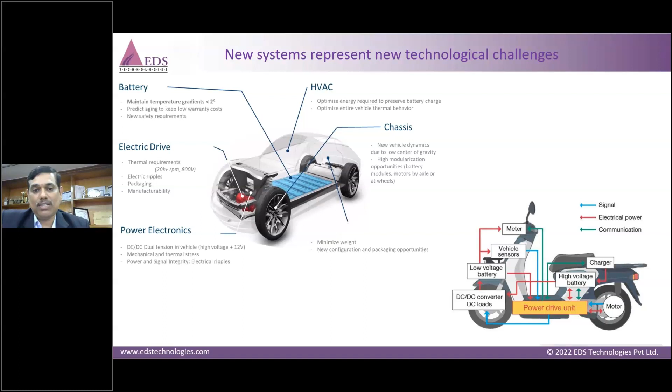Coming to delivering the digital vision, bringing agility into business processes and product innovation requires digital experience. Today everything is digitalized. In terms of transactions we carry out today, India is number one in digital transactions, overtaking China in recent times.

Every day we are very much used to doing digital payments using Google Pay, PhonePe, or other banking transactions. Everything we do in a digital fashion. We don't have to really touch the cash in our pockets as long as we have a smartphone in place. That is what digital experience is all about.

When we bring this same digital experience into the EV segment, delivering the digital vision is the utmost important criteria here. As part of this digital experience, Dassault Systèmes' 3D Experience platform provides the digital vision for the EV segment in this fashion.

We start with 3D packaging to concept, then virtual styling to Class A surfaces, and we need to validate those vehicle experiences upfront even before you start your prototype. These are the three important stages which come in as part of digital vision.

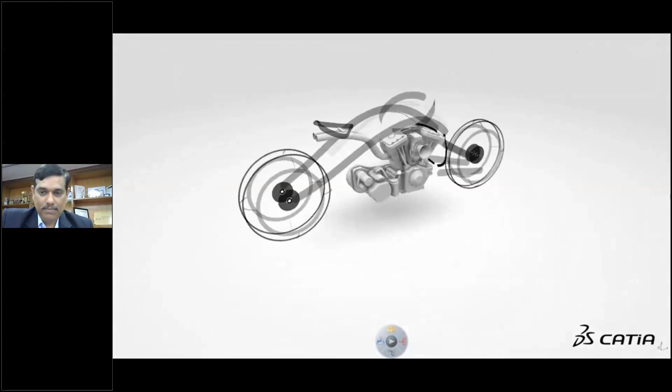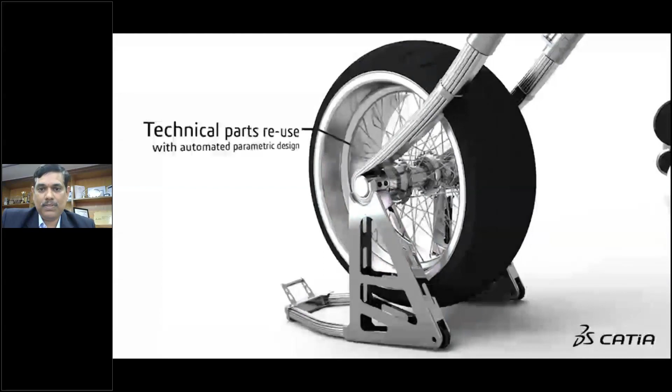This is one project, Silver Bull, started from scratch with a few sketching ideas, which have been translated into a 3D model, a 3D clay model I would say, and then the preliminary design. Then we look into the complete assembly.

This is a typical customer case study run on CATIA 3D Experience. The role is creative designer, using which we are able to start our design right from the sketching stage to preliminary design and then the detailed design.

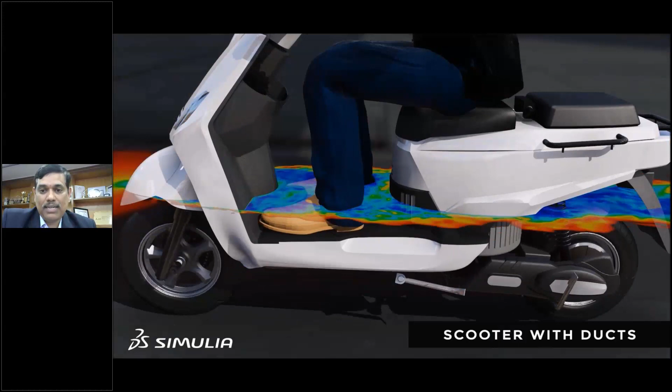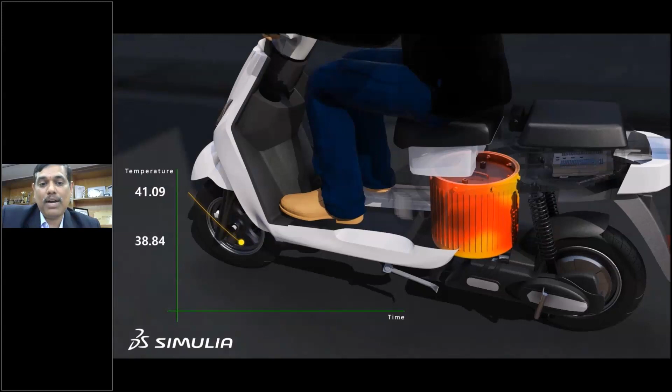This is a typical example from India, wherein the customer is looking at the design of the battery pack. The battery pack is positioned right below the sitting position of a passenger, the driver, I would say. Here the temperature and thermal management is being monitored closely as you get into specific vehicle speed levels, so we examine how this temperature impacts the battery and its cooling system.

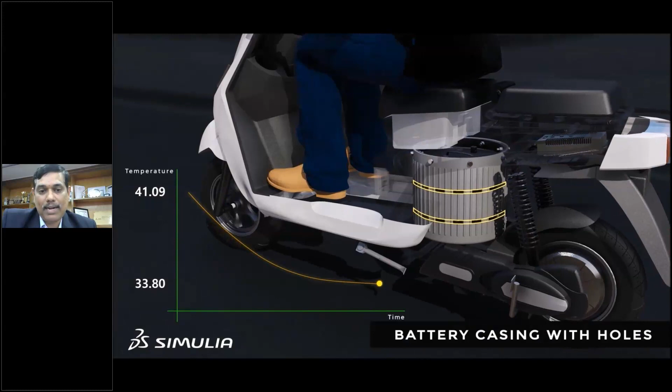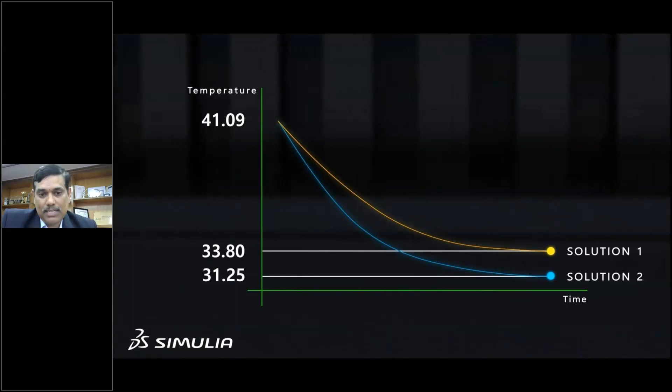In this case, when we provided specific holes to the battery system, we are able to control the temperature of the entire battery pack in a very effective manner at a specific vehicle speed that we move on. You can see the complete battery pack and the battery cells being highlighted here.

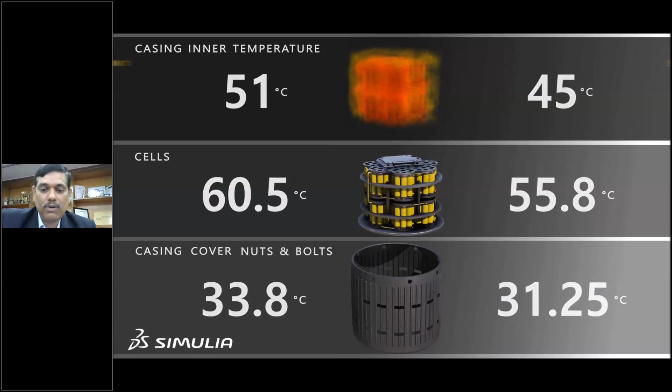When we run the first level simulation, there was 51 degrees centigrade temperature, and when we create these particular holes onto the battery pack, we are able to reduce the temperature to 45 degrees centigrade. This is a typical example even before you get into prototyping. You can create the specific design based on these virtual simulations, and these things are going to be very helpful in the long run.

So the battery cooling simulation is taken as one of the examples, wherein by creating specific holes in the battery module pack assembly, we are able to control the temperature with the vehicle speeds. There are also multiple other simulations which we can run on this EV segment for the two-wheelers. I will run through that now.

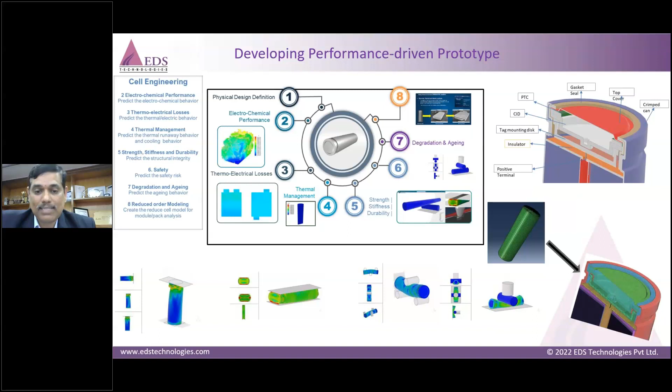Here are a few examples with respect to battery cell simulation, wherein we are able to mesh the battery cell accurately, and also expand these simulations to battery pack and battery at the vehicle assembly level.

Moving on to the important third part, that is achieving collaborative development. When we run this program, when we start an EV program, it definitely requires a lot of players to come together and work in synchronization, be it design, simulation, or manufacturing. The system should take care of the processes running through EV development. Here the PLM, what we call product lifecycle management, plays a very critical role right from the beginning in terms of collaborative development.

As a part of this collaborative development, we have supplier collaboration and sourcing, bill of materials generation, release management and change management, and also digital markup validation on a web interface. These are three important aspects of collaborative development, wherein we work closely with our suppliers and collaborate within teams — project teams belonging to design, simulation, and manufacturing, along with decision makers and managers.

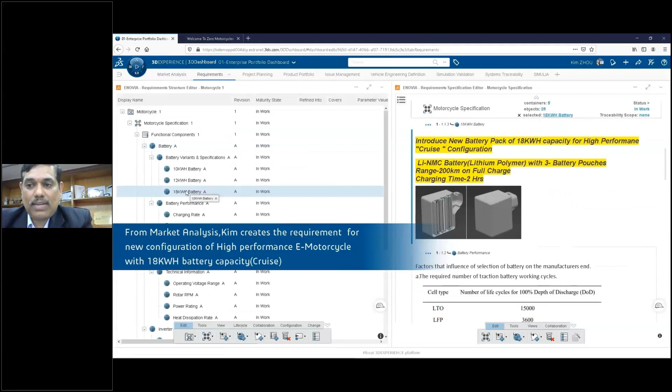There is a requirement for an electric motor vehicle — a long-range electric motorcycle with 18 kilowatt-hour battery capacity. This is taken as an idea in the beginning, with 18 kilowatt-hour capacity and high-performance cruise with long range. Long range here means from 200 kilometers onward. Looking at all these aspects, we look into battery cell engineering.

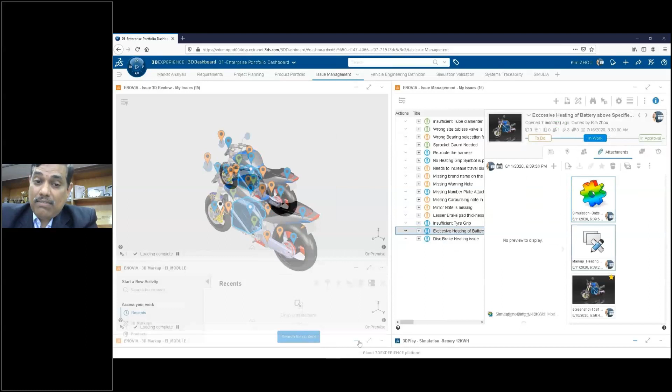There are nickel batteries, lithium, cobalt — multiple types of materials available. We pick a specific material for this battery that will deliver 18 kilowatt-hour performance and capacity. Right now what I'm showing on screen is the 3D Experience platform on ENOVIA, where we can visualize everything on the web interface using HTTP protocol. We can visualize the entire 3D of a given assembly in a 3D viewer available on the web interface — which can be Internet Explorer, Google Chrome, or Mozilla Firefox.

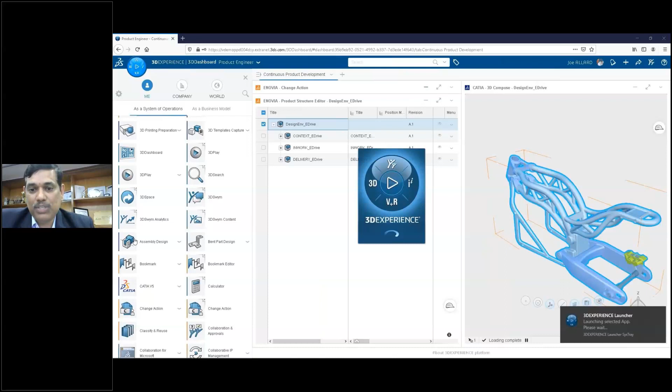We can run through this particular battery development — how to bring in this new battery and replace the existing one. This is where we look at change management, which we emphasize as part of this collaborative development. There is an assembly that holds the battery pack, so we open that in the CATIA 3D Experience platform and replace it with the 18 kilowatt-hour battery pack.

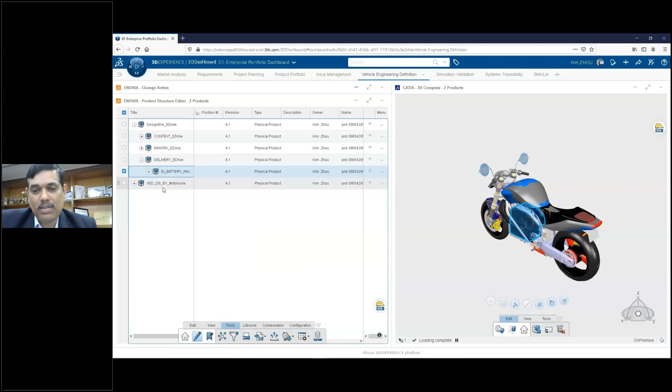Once we complete that, the bill of materials also changes, and the change action is performed on replacing the specific battery pack. Once we complete that, we can validate it again in the 3D viewer, approve the changes, and later see the updates in the engineering bill of materials.

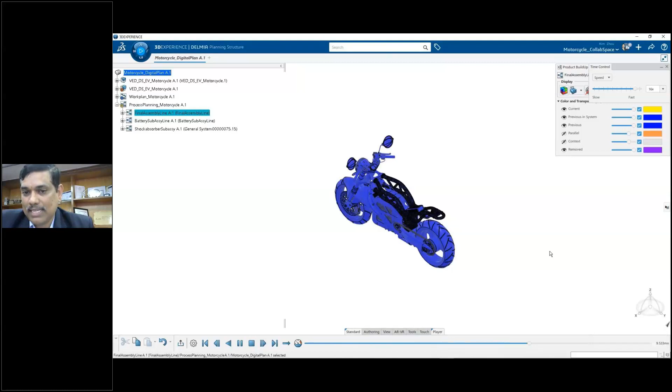The changes that are done can be highlighted with color intelligence in the business intelligence navigator. Once we complete that, we move on to the shop floor with process planning. The Delmia process planner role helps us with assembly planning, and the assembly also gets impacted by the process planning for the 18 kilowatt-hour capacity battery pack.

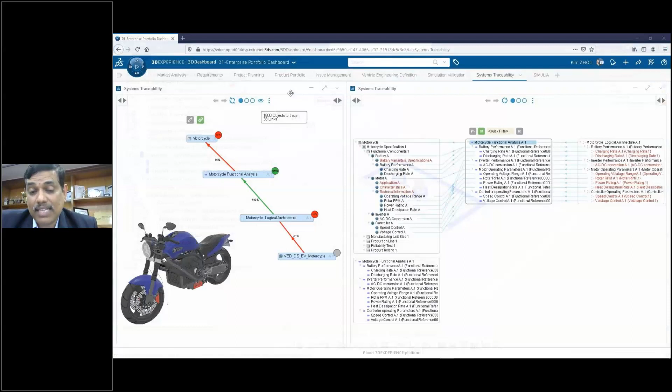In this case, we're able to visualize everything in 3D without having to come out of this particular screen. We move from design to simulation to manufacturing in a seamless manner, with this collaborative environment in place. This is the typical progress you can see using the 3D Experience platform, covering all these aspects of collaborative development.

We can also create our own technical communities and bring in new ideas. Based on the new ideas, you can decide to go for a change action, and once that change action is updated, you can see the changes in the assembly — visualizing those updates instantly in the 3D viewer on the web interface itself.

So we have all three aspects: starting with the digital vision, then developing the performance-driven prototype using specific virtual simulations, and then seeing the entire business processes flow through a collaborative environment. These are the three important aspects that bring agility into all the business processes and product innovation you take up under the EV segment.

These are some of the case studies I wanted to highlight in this webinar, where our customers have really benefited from this exercise. There are new startups who have taken up this challenge, taking the complete package — seeing the digital vision as well as the collaborative development with the prototype in action. This will be especially useful for all the EV startups, particularly in the two-wheeler segment, who are coming out with new products and new product variants.

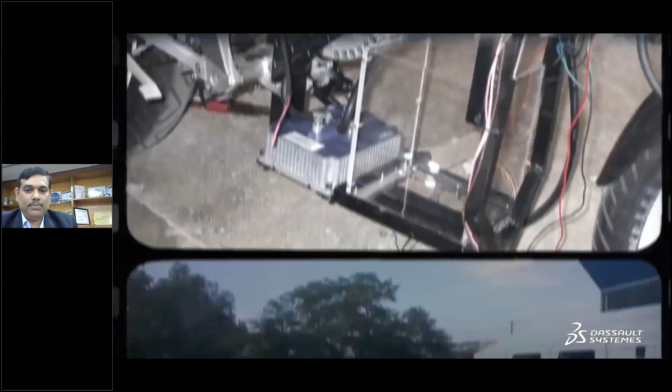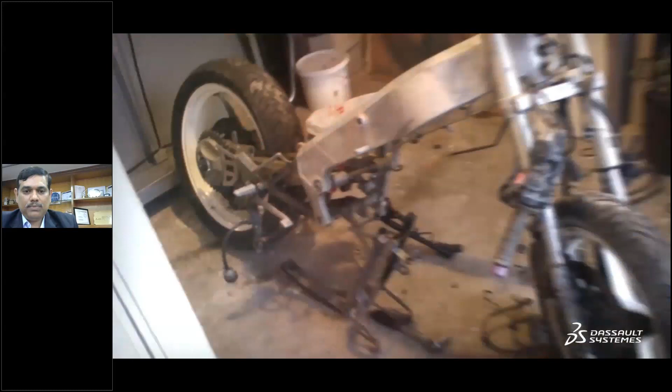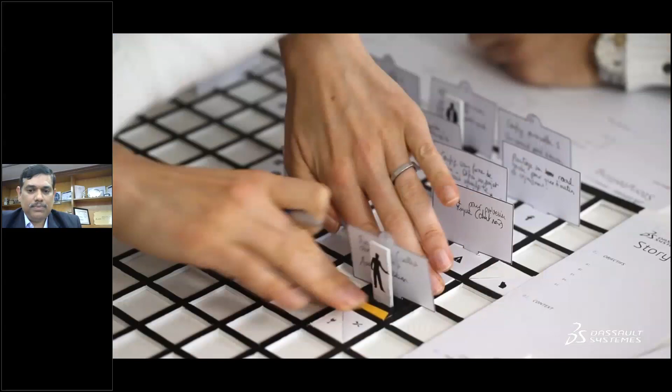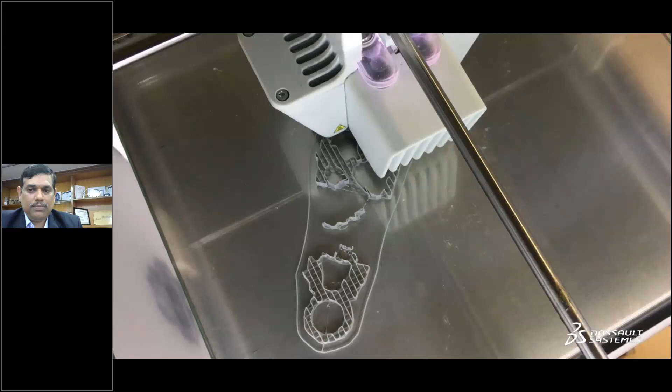Imagine a kid who loves motorbikes and dreams of making one from scratch, but all electric. That kid, that's me. The project is ambitious, but I'm crazy enough to get it started. I have a vision - I am convinced tomorrow's motorbikes will be powered by clean, reliable, silent energy which will redefine mobility. After loads of work, I have my first prototype up and running, and I get the chance to show it off. Naturally, real life catches up with you. Compromises have to be made. I decided to put the project on hold and join a big company. And so you put the project on hold - what happened next? Then I meet someone very important. Neuron gets started. We work quickly, we develop our first technical prototype. An opportunity comes along to meet the Dassault Systèmes design team within the incubator program. They confront us with their experience thinking methods. We then define the Neuron services model using a systems approach. The 3D Experience platform on the cloud keeps us connected at every step of the way - it makes us very agile. We sketch, we model, we 3D print, we validate technical hypotheses. This collaboration ensures continuity all the way to industrialization. But the money runs out - the incubator program is over. So, it's all over? Technically, we've made a giant leap. Life goes on, and I'm on my own again. But I don't give up. I've finalized the concept - the second technical prototype hits the ground and takes off running. Concept identity is robust, everyone wants their dreams to come true. I appreciate the help of my partners. But actually, it's not over yet - the story has just begun. I am Sebastian Naru, founder of Neuron.

So this is a typical live case study from Neuron Motors, wherein they were able to successfully come out with their first prototype, and the second one which is their dream in reality.

So this is how the electromobility accelerator program can definitely help all EV startups, be it two-wheelers, four-wheelers, or tri-wheelers. We are supporting our customers, even including segments like EV buses, wherein we have presence, and we continue to support our customers very closely in the EV segment.

Coming back to this, so three major steps - starting with developing a digital vision, followed by a performance-driven prototype, and achieving collaborative development - through which we are able to emphasize new product development under the EV segment.